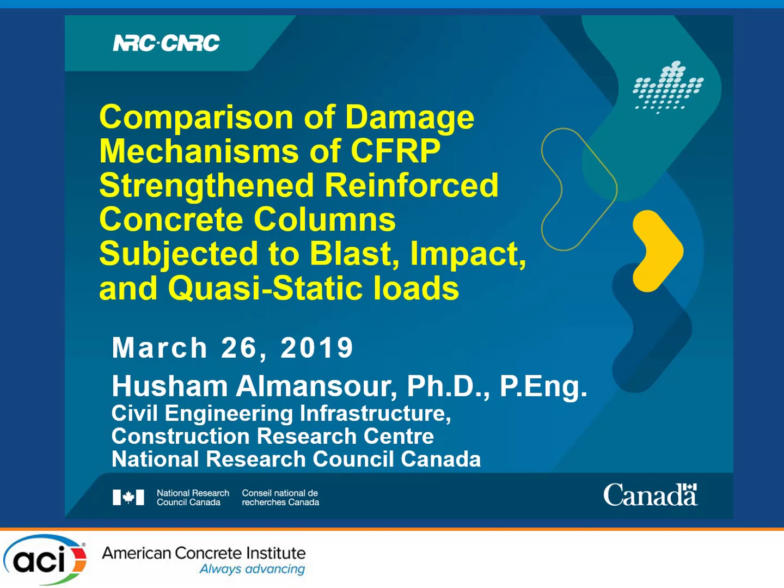I will go over a short introduction, then discuss blast versus quasi-static and impact versus quasi-static in terms of damage mechanism and the behavior of the column, because we investigate columns here, followed by the final conclusions.

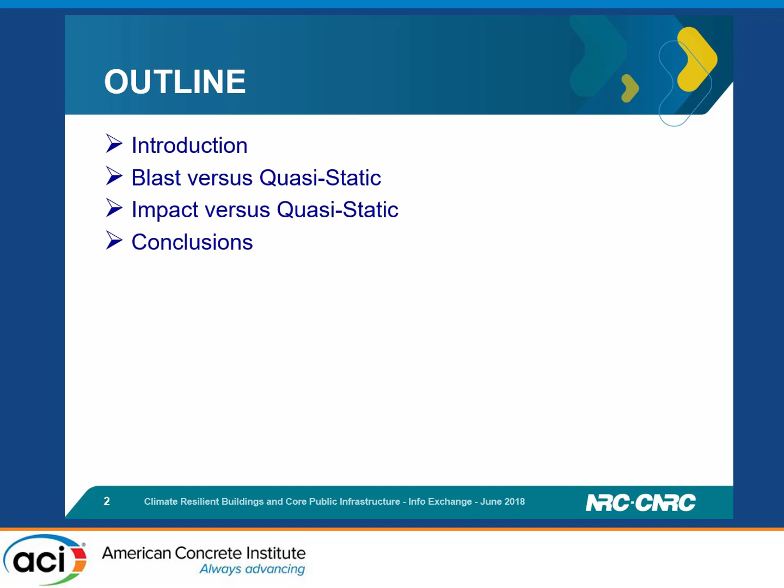There's a growing concern about man-made hazards such as blast attacks and sometimes high-speed impact resulting from debris due to the blast itself or ballistic attack. There's a need to mitigate the risk of failure and the successive progressive failure of buildings due to these extreme loads, and to investigate the capability of advanced composites.

The focus here is on CFRP, as you will see, as part of a bigger project. The other part, unfortunately, is classified, where very advanced materials were used in the next stage of protection to provide extreme protection for some important facilities. But this is the open, publicly available part of the project.

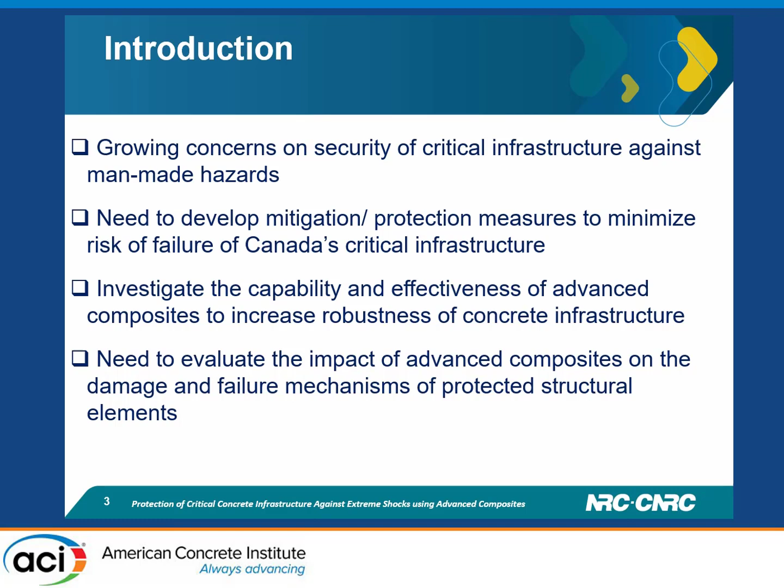The need is to evaluate the impact and advantage of advanced composites on the damage mechanism. So what is the difference when we are using advanced composites? This is an example of severe damage in a building.

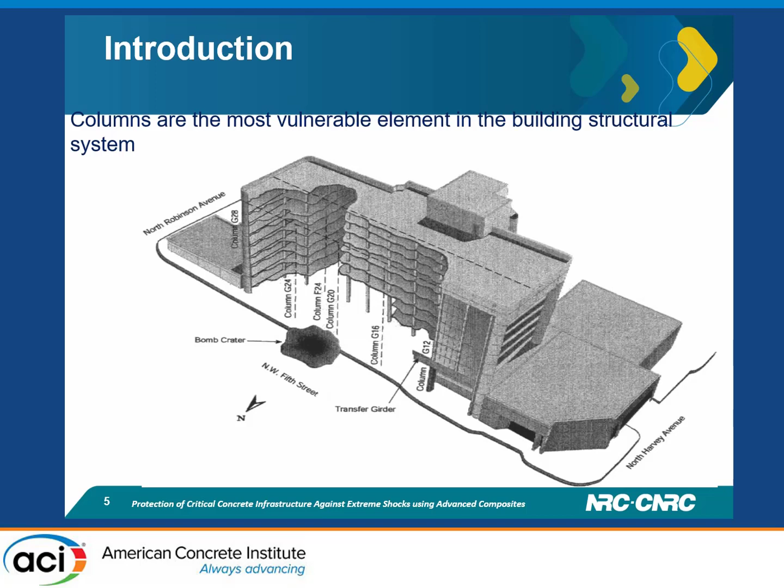When the explosion is very close to the building, it's considered a near-field explosion, typically around 10 to 15 feet from the face of the building. But in general, in this study we discuss both that and the far-field explosion, when the explosion is more than 100 feet or more from the targeted building.

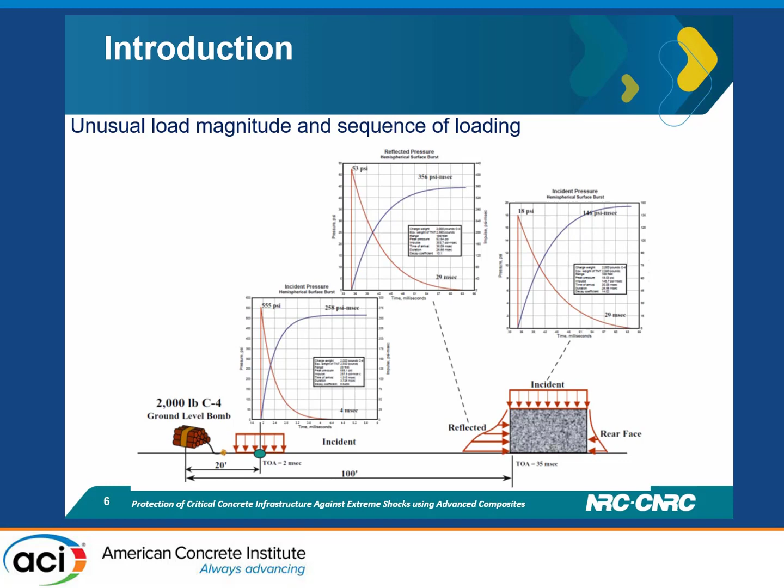The formation of a full blast shock can be seen in those cases, but also the magnitude and sequence of loading due to reflection, especially in the urban environment, could result in multiple attacks to the buildings, rather than the single event we can simulate in the lab.

Here is an example of the mechanism of failure. As the blast wave is progressing and developing within a very short time, in the first picture at top, one...

The blast wave just reaches the surface, or the exterior envelope of the building, and then sudden damage to the exterior envelope could happen. Because of that, there is a massive uplift pressure applying almost tensile stresses on the columns, while of course we design columns for compressive force.

After that, as the bulk of the pressure exceeds the building, there is a back-force pressure and up-to-down pressure generated with the evolution of the wave, and then we have massive back compressive pressure applied on the columns. So the columns at the beginning face lateral pressure, then tensile pressure, then sudden compressive pressure, depending on the size of the explosion itself.

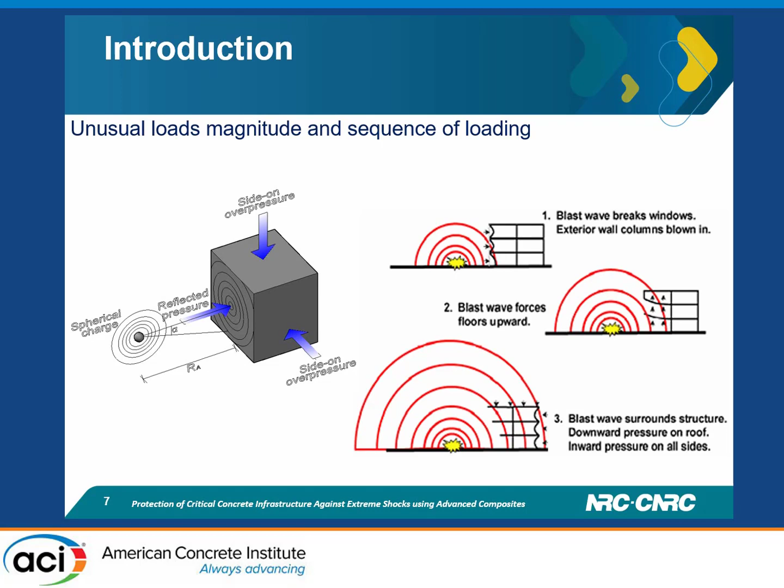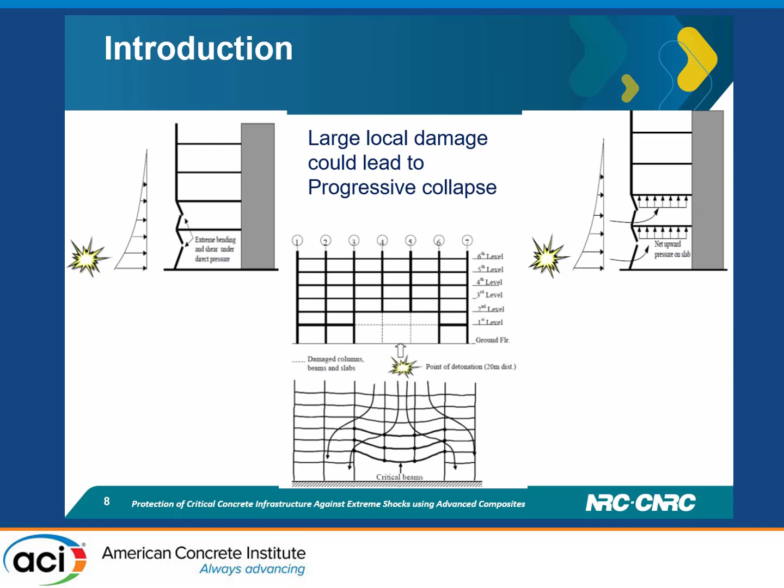As a result, different local damage could lead to progressive redistribution of forces in the building, and then progressive collapse could happen. The progressive collapse can be very severe or localized, depending on the design of the building itself.

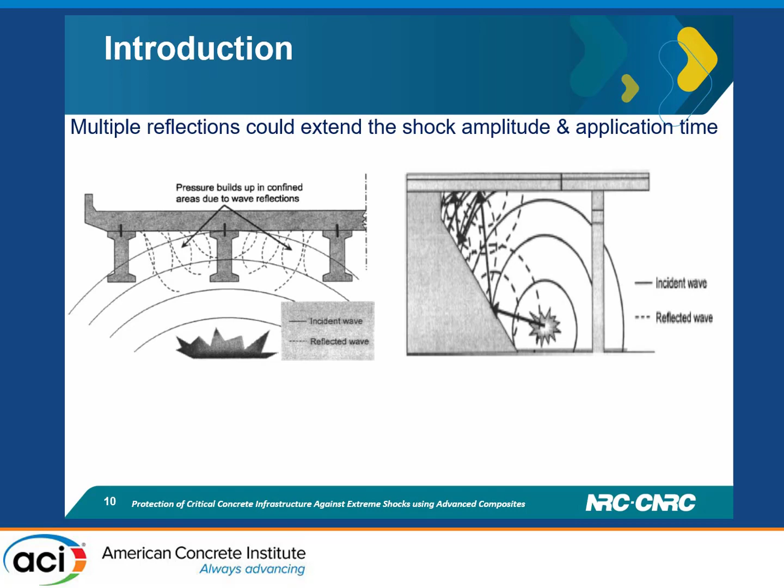In other environments, when reflection is a big issue in the explosion, similar to an explosion below a bridge, the reflection can actually magnify the blast pressure and extend the period of the pressure by up to 3 times, as observed by several researchers.

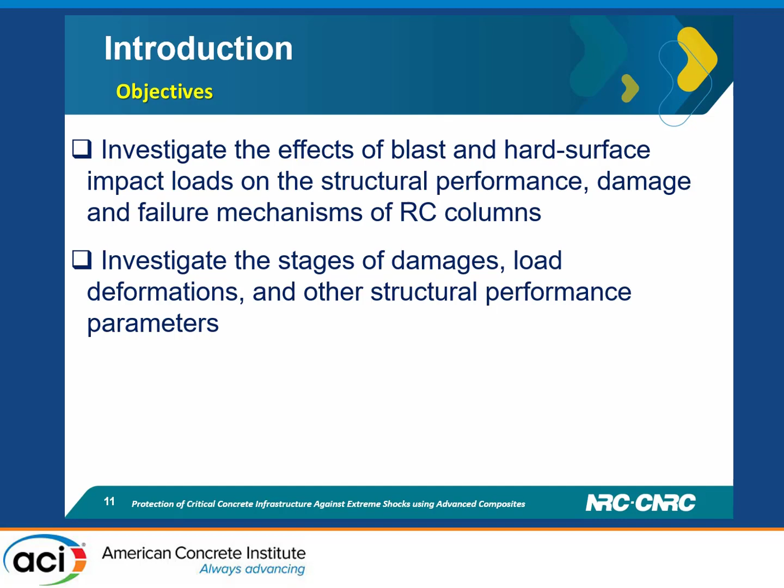So the major objective is to investigate the effect of blast and hard surface impact loads on structural performance and the damage and failure mechanisms of reinforced concrete columns, and also to investigate the stage of damage, load deformations, and so on as structural performance parameters.

In the experimental part of this study, we have a column with a section size of 6 by 6 inches, 150 by 150 millimeters, and a height of around 2.4 meters. We selected a pin-roller boundary condition in the lateral direction, while applying an axial load up to 40% of the full capacity of the column.

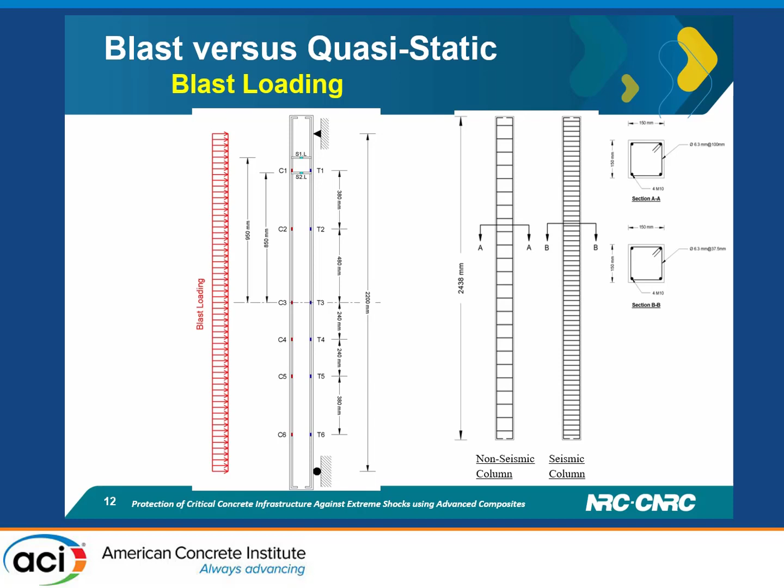We monitor the lateral reaction and also the change in axial force during the test. We use very advanced monitoring technologies, capturing up to 1 million data points per second per channel.

We also monitor the strain wave inside the steel and on the surface of the concrete, and in between the surface of the concrete and the FRP, which isn't shown in detail here due to time. For the blast test, we have a total of 32 columns tested in 2 different matrices.

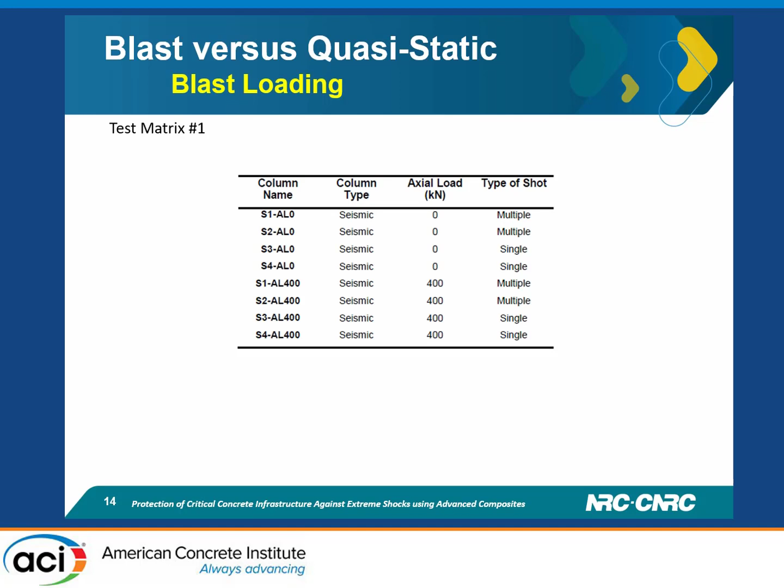Matrix 1 explores the effect of axial load versus no axial load. The second matrix explores the effect of FRP with different orientations. We have laminates from different layup and different fiber orientations.

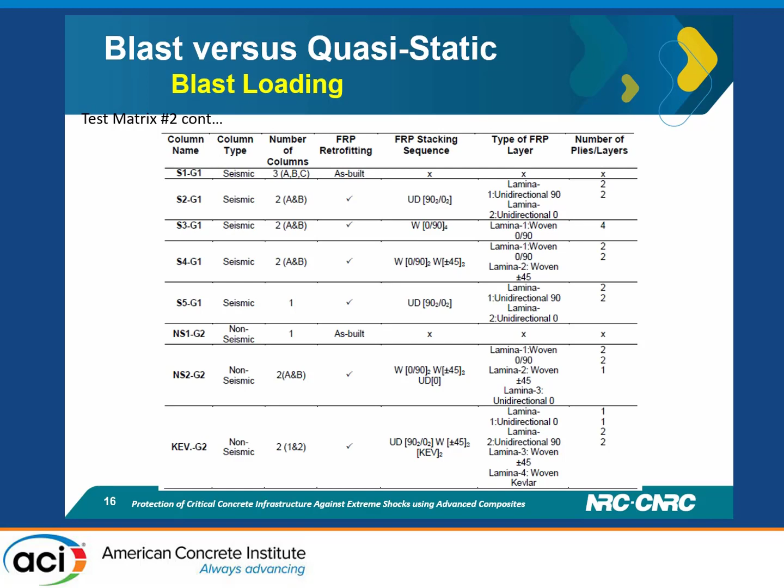The FRP used is CFRP with epoxy resin. Here are details about the orientation types and how many specimens per test, and I will show you a sample of the results.

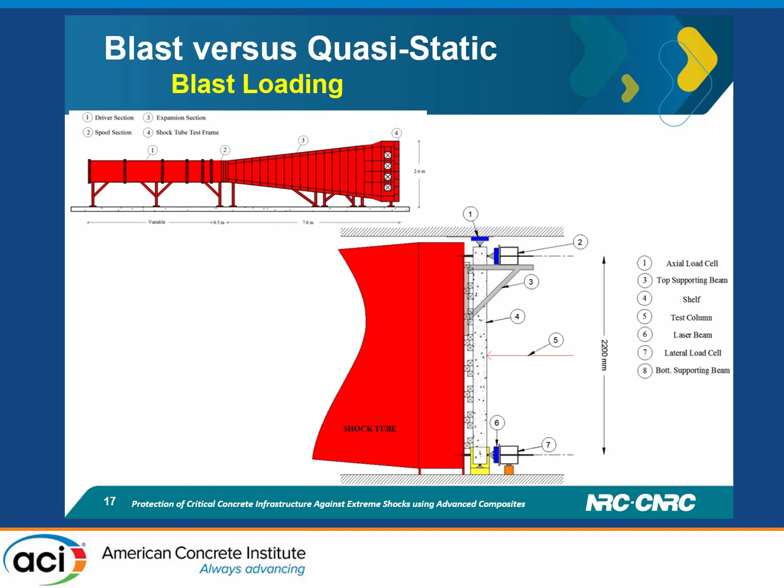We used the University of Ottawa shock tube. Here is a simplified sketch of the system showing lateral load measurements at top and bottom, and we use laser devices to capture deformation and high-speed cameras to monitor the test. We analyze all the strain and strain waves throughout the formation of the plastic hinge.

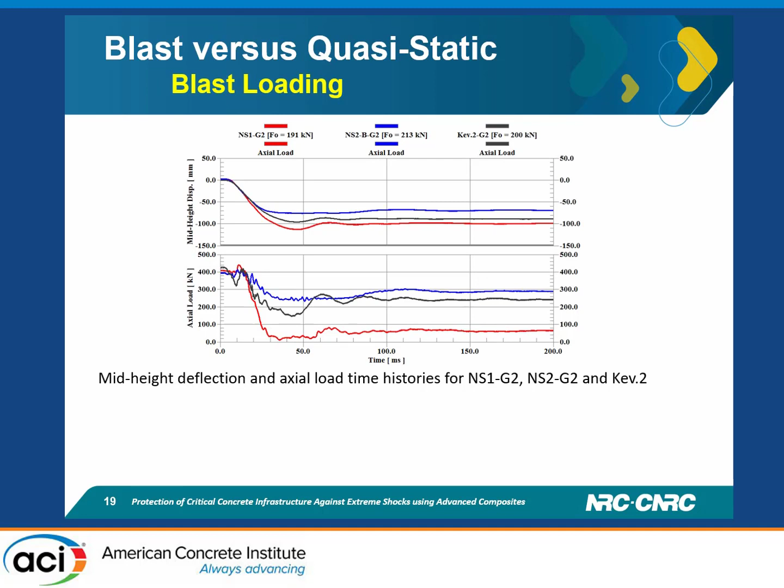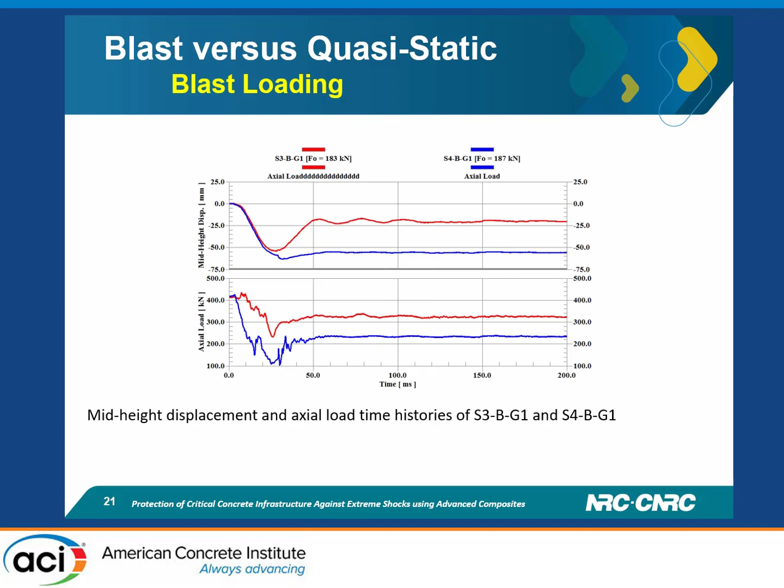Here are more examples of different types of FRP and how the failure develops. This is the deformation time history of some specimens, and I will show you the resistance function.

I didn't mention that some of the columns are designed according to the 1963 code for non-seismic columns, because the major objective is to investigate the strengthening of existing buildings. Some columns are designed for seismic design, and then we compare between different FRP orientations.

As you can see, some orientations give an extremely high response, and then bounce back to near original position with very high energy absorption.

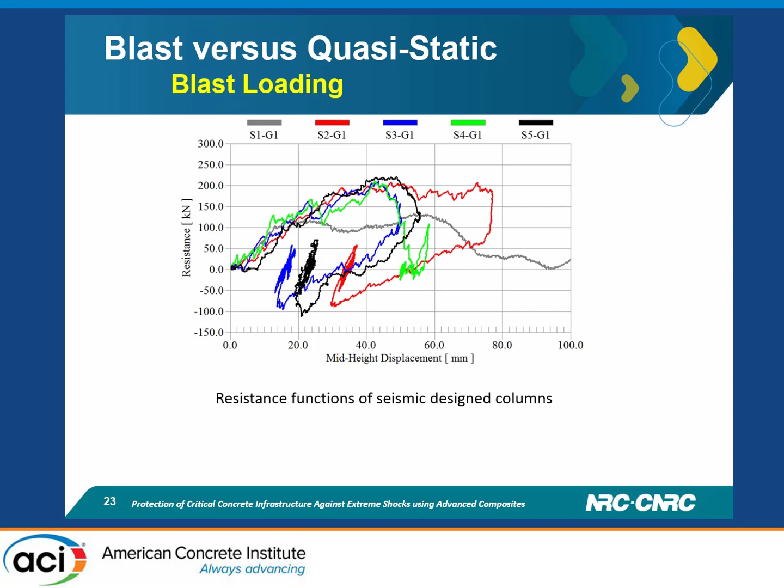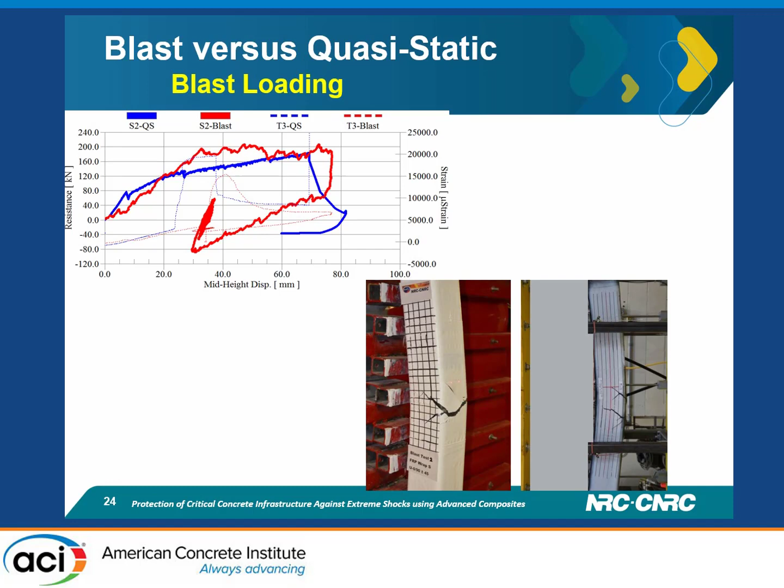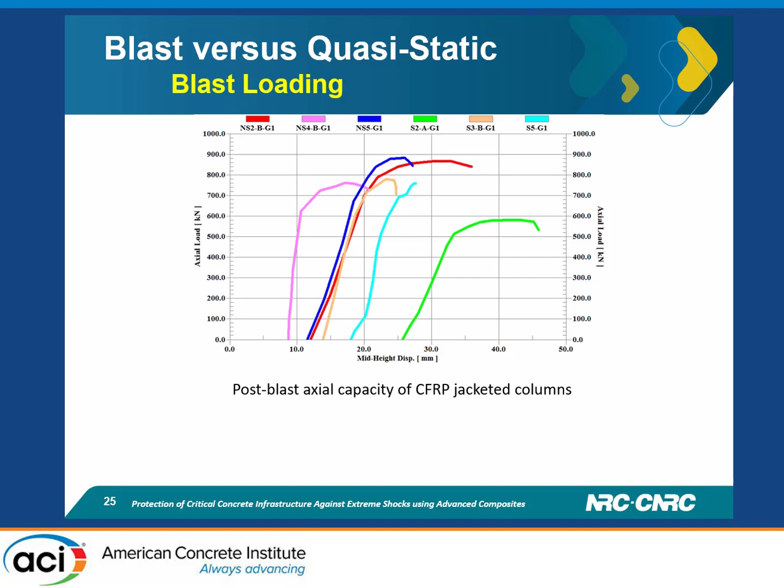Some configurations give more strength when using plus minus 45 and 0/90 FRP, giving much better behavior than expected. This helps maintain higher capacity after the real blast shock when the pressure phase comes, as I explained earlier. Now here are some videos.

I don't know how to run the video... it should be the mouse. You click on that, and then... is it working? Yeah, it's working now. I want to click to the second one. You just click there, okay.

Here is a non-protected column. As you can see, the damage is massive, and this is just a sample; some specimens develop even larger deformation than what you see here.

This is the second test. I don't know if it's working... yeah, it's working now. You can see this one is with the FRP, and the column just bounces back.

Just to mention, with the FRP the column withstood the total shock at the extreme capacity of the shock tube, while without the FRP it failed at almost half of the shock tube's capacity.

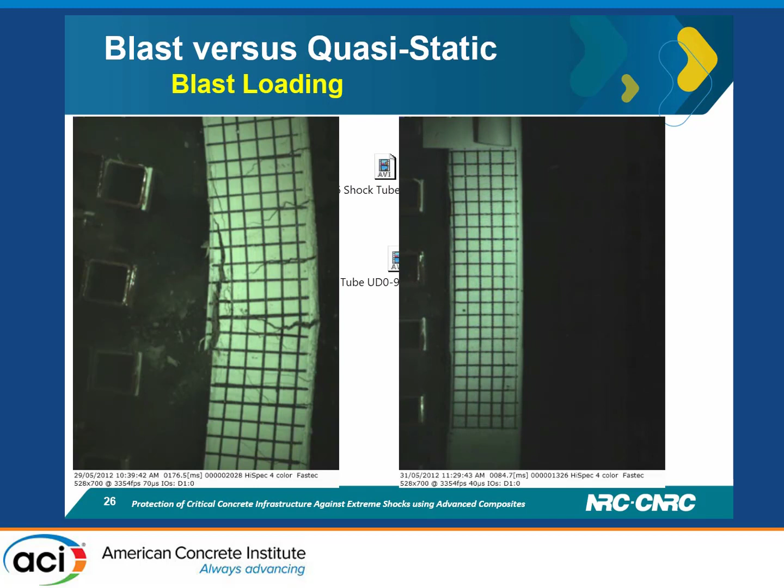For the quasi-static tests, we developed a system that can simulate the uniform distributed load while simulating the blast, but applied very slowly. It can achieve very high deformation, while also applying full axial load and fully monitoring the reactions.

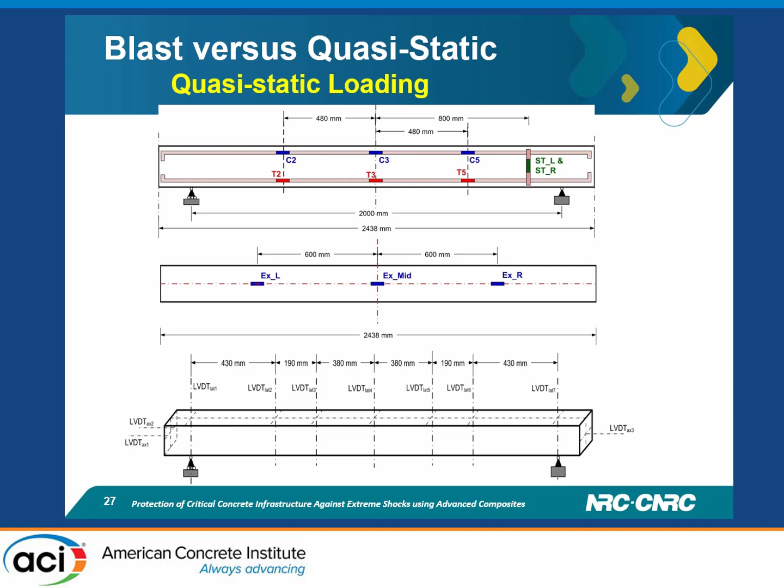The setup is similar to the shock tube setup, but now we use quasi-static testing in our labs with the exact same type of FRP and setup, so we can compare the results with the blast tests.

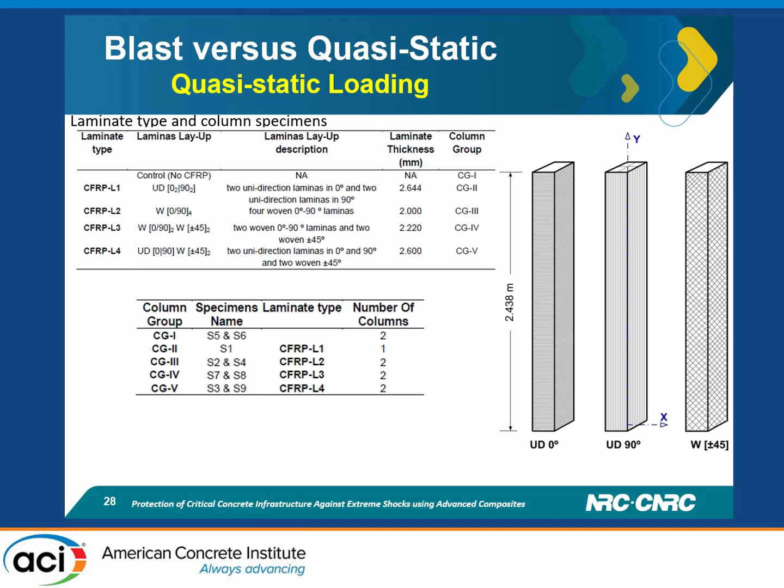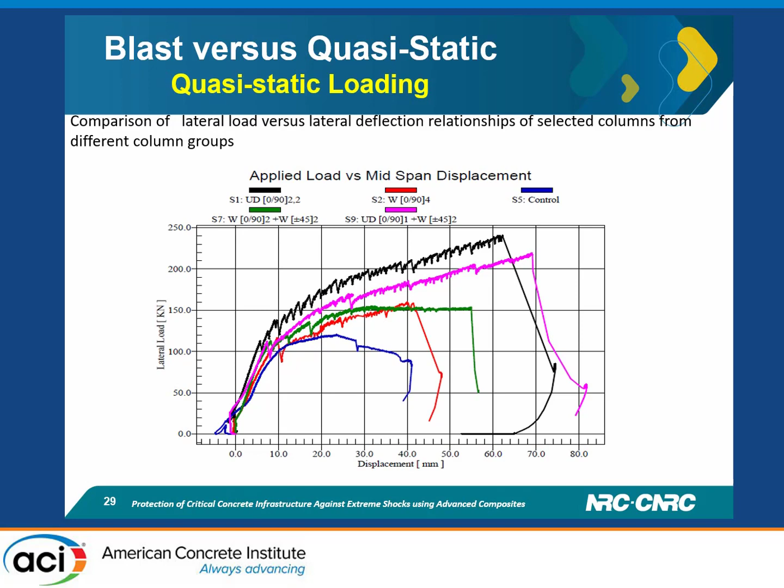As you can see, the load-deformation curve from the quasi-static test is shown here, and here is the development of deformation up to full failure over the length of the column.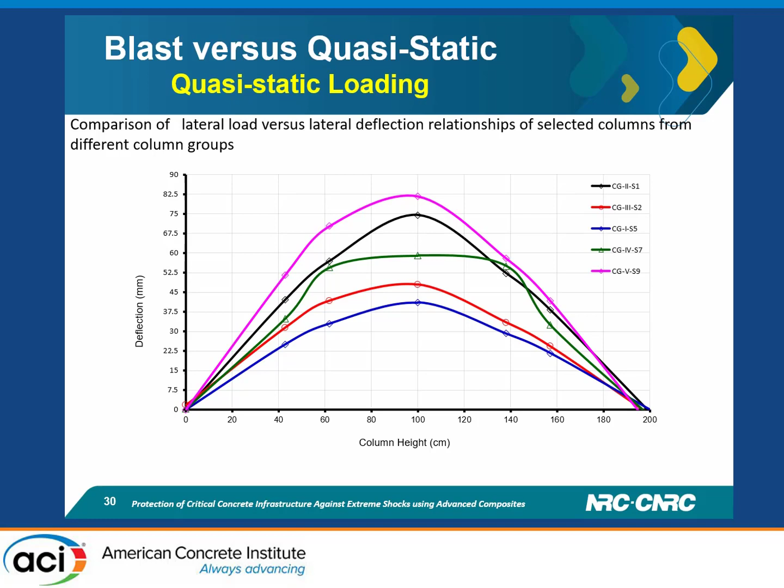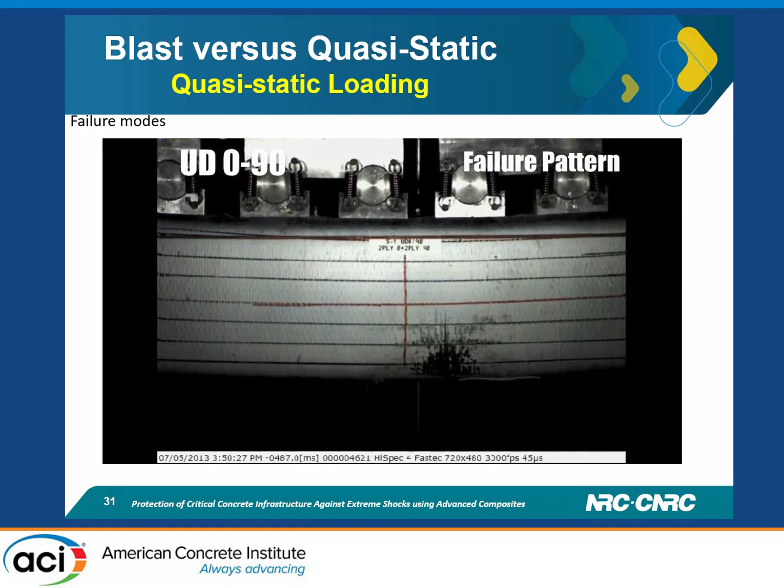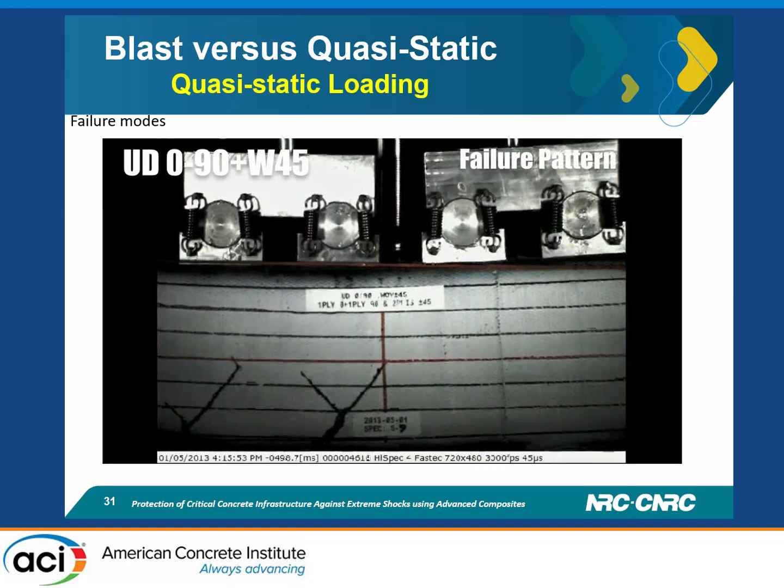Here is a video which shows you the differences in the failure modes. As you can see, here is 0-90, here 0-90 plus minus 45, and the failure of the FRP is totally different. And here is woven 0-90, again 0-90 but woven, and the failure of the FRP is totally different, which we can see better in slow motion than in the shock tube.

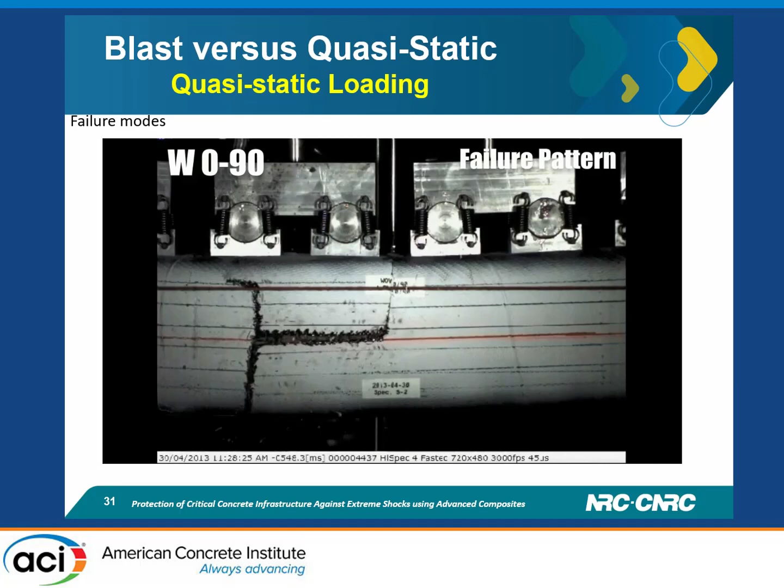In the impact test, we used exactly the same boundary conditions. We have lateral pin rollers, and we apply axial load at the same level, but then we apply impact force at the mid-height of the column using a special device that pre-accelerates a mass, and a hard surface impacts the mid-height of the column. We also changed the distribution of strain gauges inside to maintain good monitoring of the strain wave as it migrates through the column, and we monitor the reactions, the axial load, and the cracks using a high-speed camera.

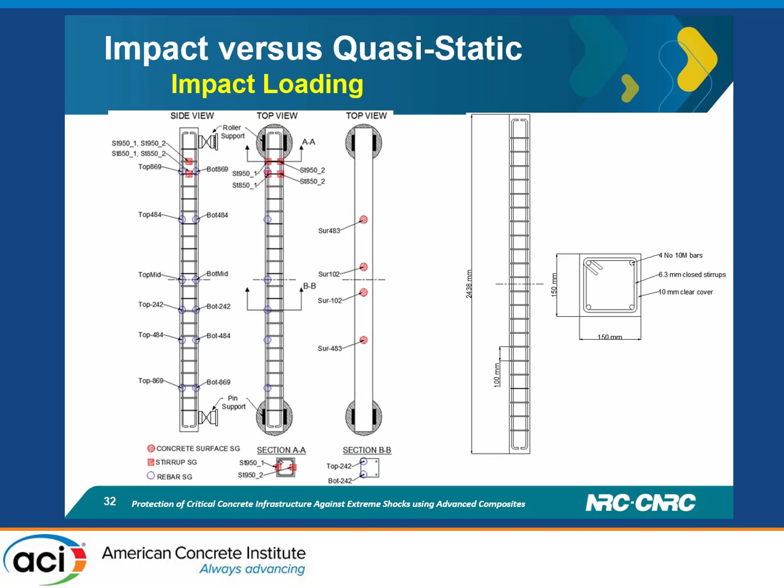This is a comparison with the quasi-static test. In the quasi-static test, we use the same setup and the same circular or cylindrical surface that we apply the impact load with, but now applying the load very slowly, and we compare based on the level of deformation in each case and how the damage develops.

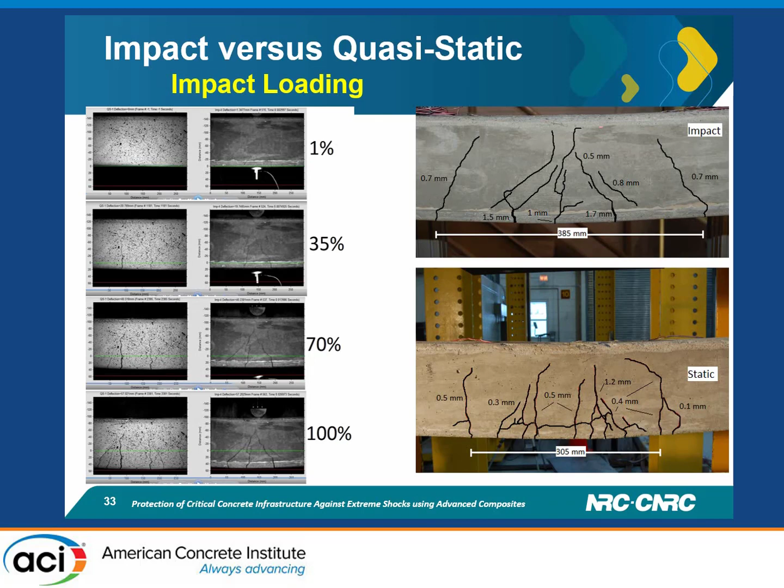You can see in the impact a shear plug is formed, shown in the top picture, while the lower picture shows regular flexure under point load.

We have a video here showing how the damage develops. The left is the quasi-static, the right picture is the impact. You see with the impact the accelerometer left the specimen because of the big shock, and then you can see the shear plug is fully formed.

I have to mention that in the reaction we have a negative reaction developed in the two reactions. We also monitor the shock, the strain wave in the reinforcement, which starts from the center of the impact toward the supports. And of course, we study different types of impacts, different speeds, different masses, and so on.

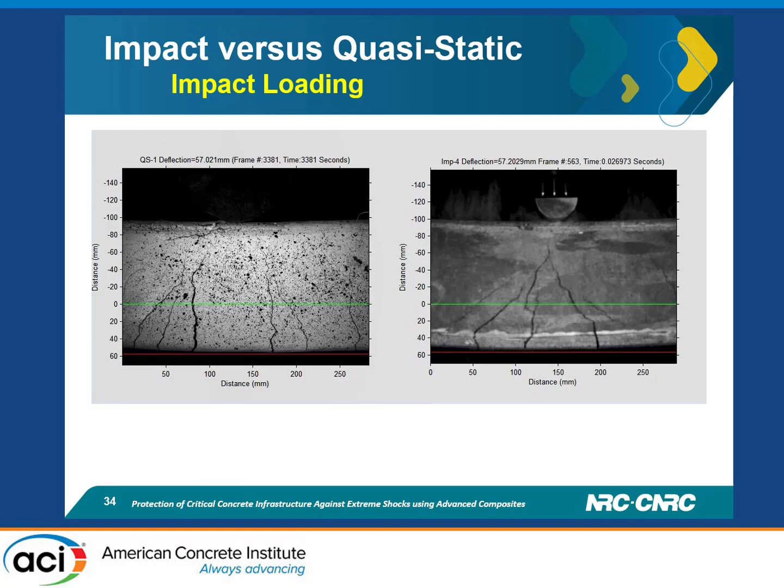The observations here are that when using CFRP jacketing, a significant improvement in strength and deformability is observed, but it differs between different layups.

The base layup uses zero, which is in the direction of the column, the main direction of the column. The 90 is the lateral direction. And when using plus minus 45, the ductility is improved a lot.

We studied different percentages between those three types of layers and different locations of the layup, and we concluded with one of the optimum distributions.

We call each one a laminate, and we name laminates by numbers. The highest strength is when using 0-90, but the failure is non-ductile.

But with the one using plus minus 45 and 0-90, we have a compromise between strength and ductility, and the failure mode is highly controlled.

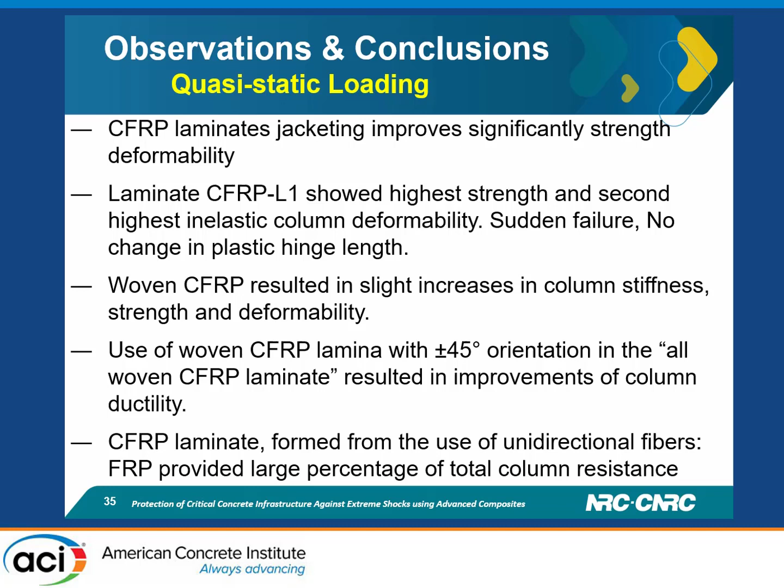Now I will go forward to the quasi-static results. In the quasi-static test, the failure mode is very similar to the blast failure. When applying very high speed load, or applying uniform distributed load as in the case of the shock tube, and when using the quasi-static mode of loading, they give exactly the same failure.

However, the effect of the high strain rate, when calculated as compared to, for example, the US Army standards or other standards for blast design, gives a lot of sense to use amplification factors for the material and the level of strain rate we are using.

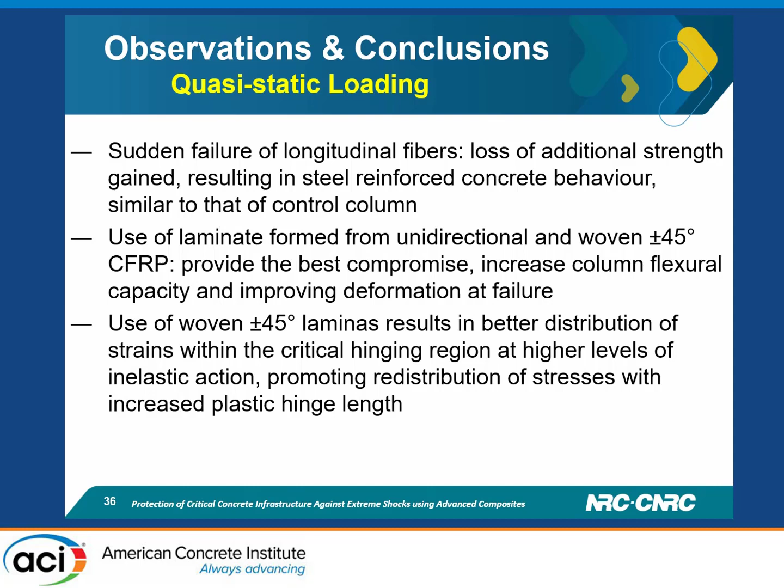Now, using woven plus minus 45 improves the ductility, and we developed a new calculation for the plastic hinge when it's used with a single degree of freedom simplified analysis model.

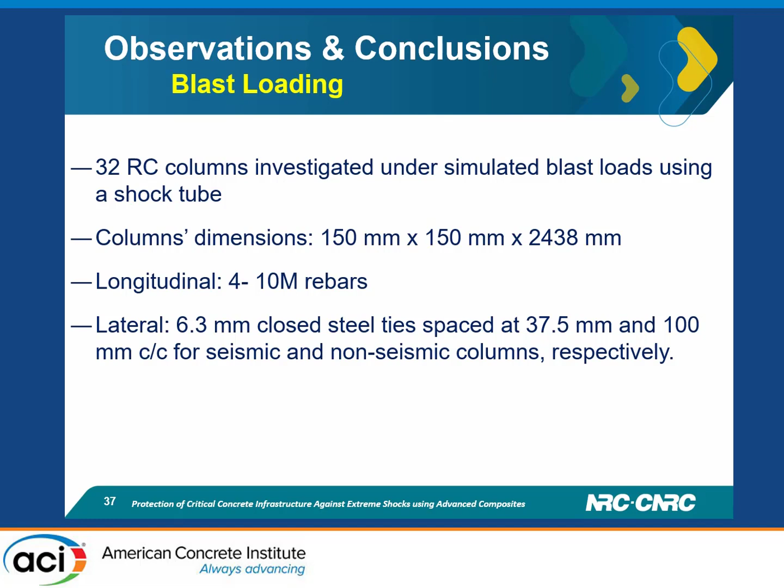Parallel to that, this summarizes the blast test. In the blast test, we again compare different layups, and we found that the layup I mentioned, 0-90 plus minus 45, gives the best behavior in terms of the highest energy absorption and better ductile behavior, etc.

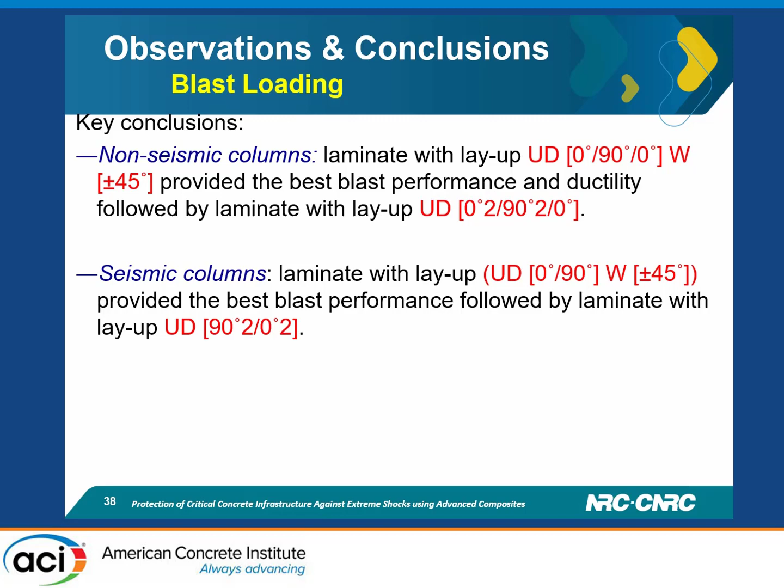The single degree of freedom approach was used in parallel with advanced modeling as well, using software we developed and LS-DYNA, but those are mainly for parametric studies on bigger structures where we calibrate them with test results, and then we expand the study to progressive collapse, etc., for full-scale structures.